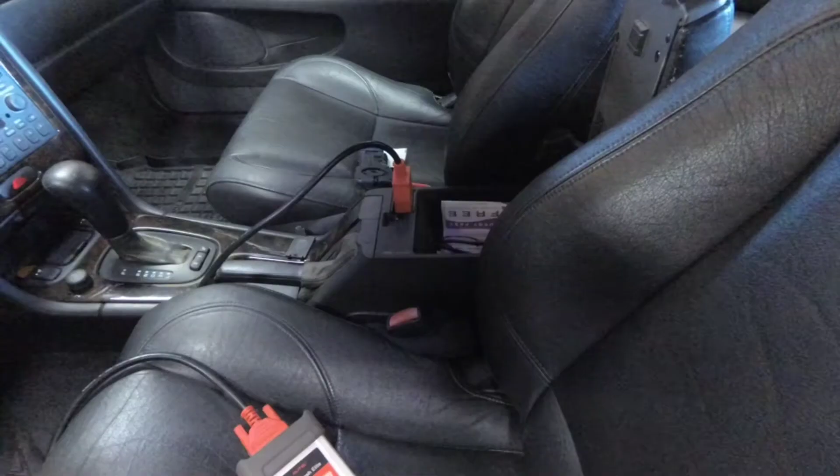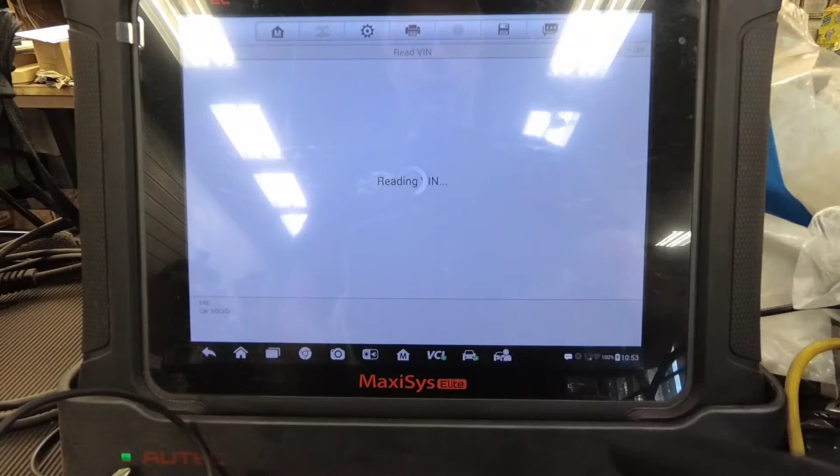Here's another unique thing about this car. The OBD2 connector, according to the service literature, is supposed to be in front of the gear shift lever in that little compartment where the coin thing is, but it's not. It's actually in the console under the cover. Took me a while to find that. So we'll see if this MaxiSys Elite will read the VIN number out of this Volvo. May not support auto ID, but we'll find out shortly.

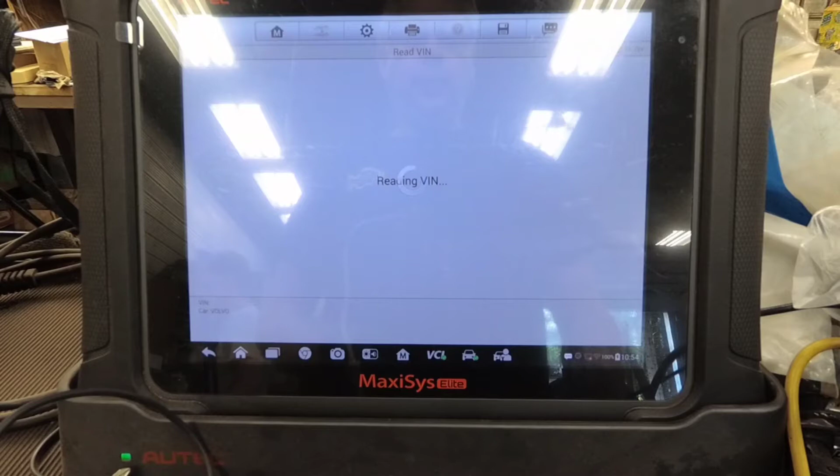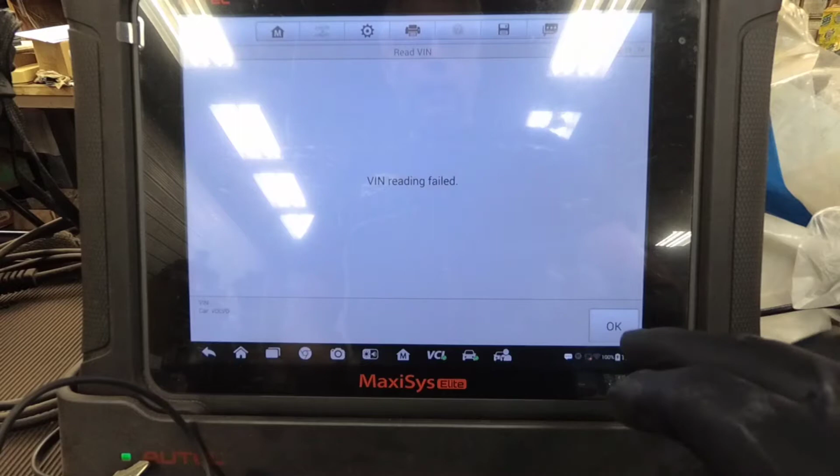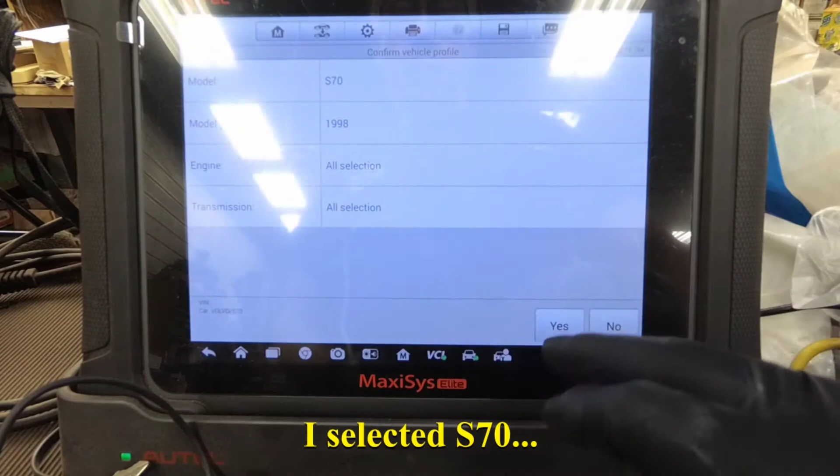So it was not able to auto ID it, so we're going to manually ID it. Manual selection, 98, North America, S70, 98. All selection. Yes. Diagnosis. Auto scan. See if it'll do it. This is why you need to have more than one scan tool. And I'll pick up when this finishes scanning.

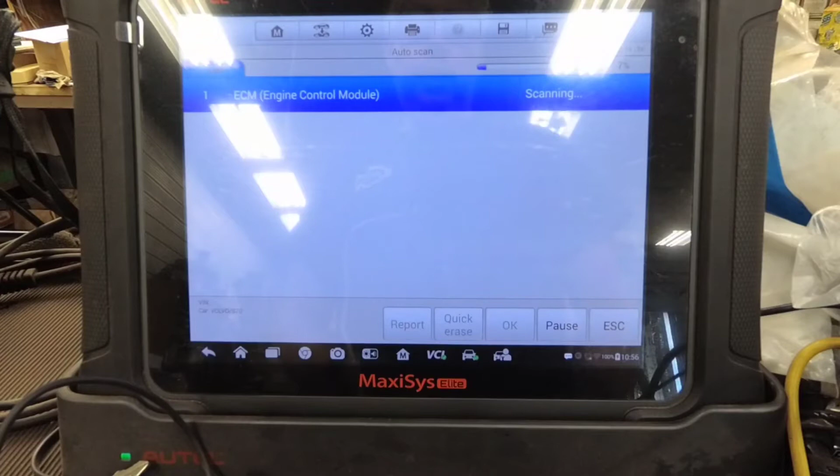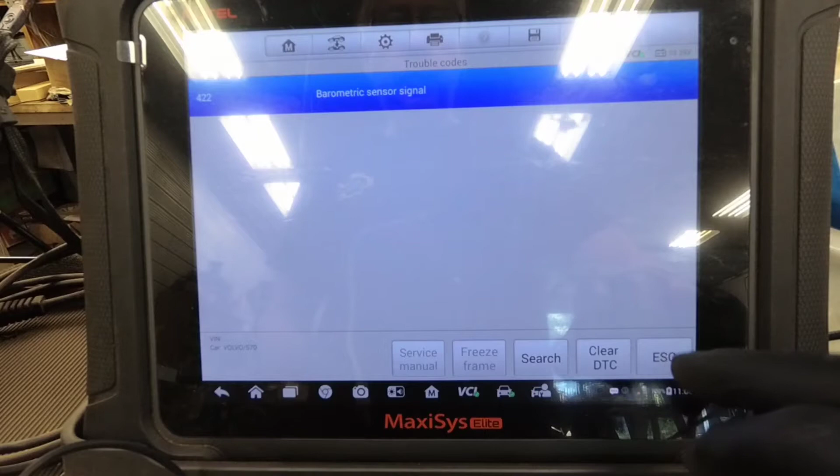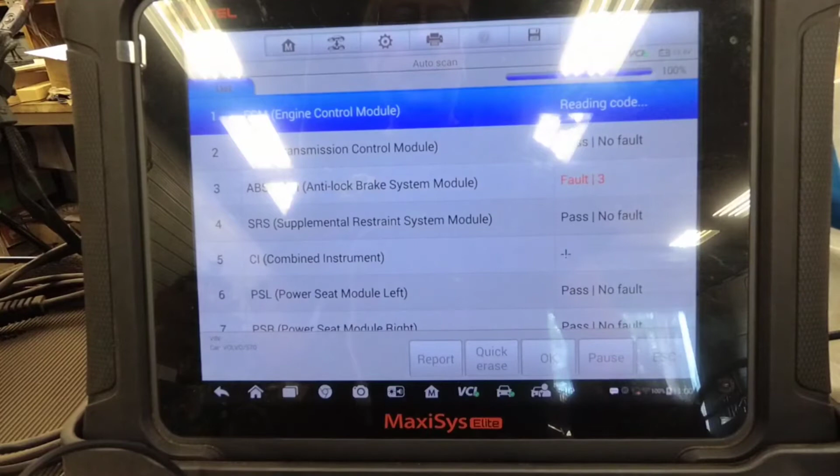And we're going to go in here and have a look at the anti-lock brake system codes. So now we'll go into the ABS module directly. I could have gone to the system report and seen a listing of all the codes in there as well. Wheel sensor signal right rear circuit fault. Wheel sensor signal right rear extrapolation counter. That's a big word. Pump motor electrical or mechanical fault.

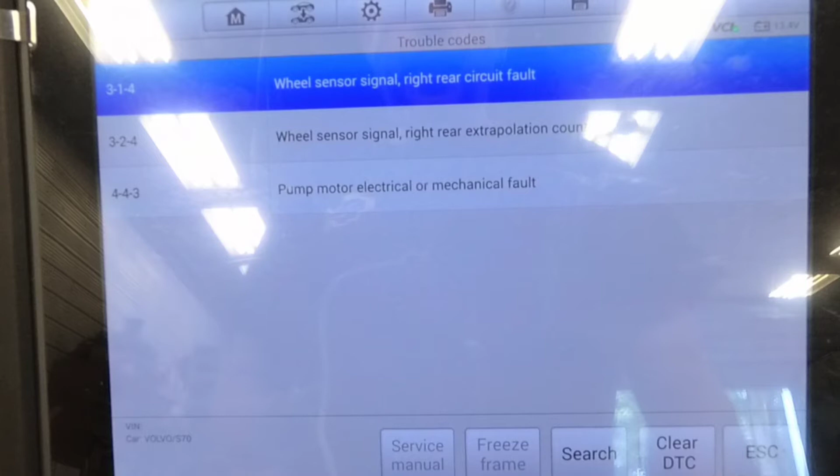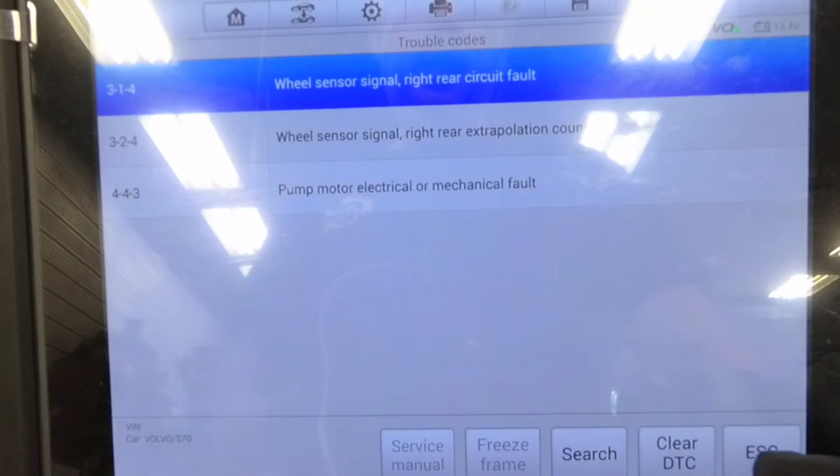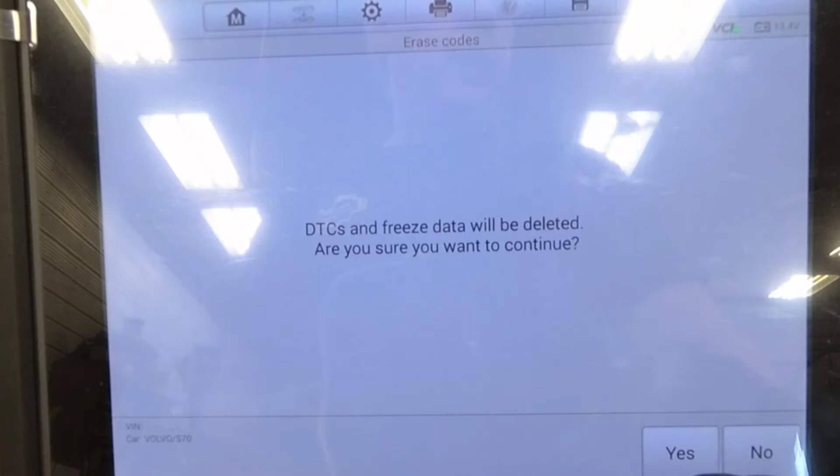Well, these two are probably a wheel speed sensor problem, but this one here may be a problem with the pump motor. Now it's hard to say which one is. Of course, a faulty wheel speed sensor may cause it to run the pump more than it needs to. We're going to clear all these codes and see what comes back, if anything. Wonder if it clears them individually. No, these two keep coming back.

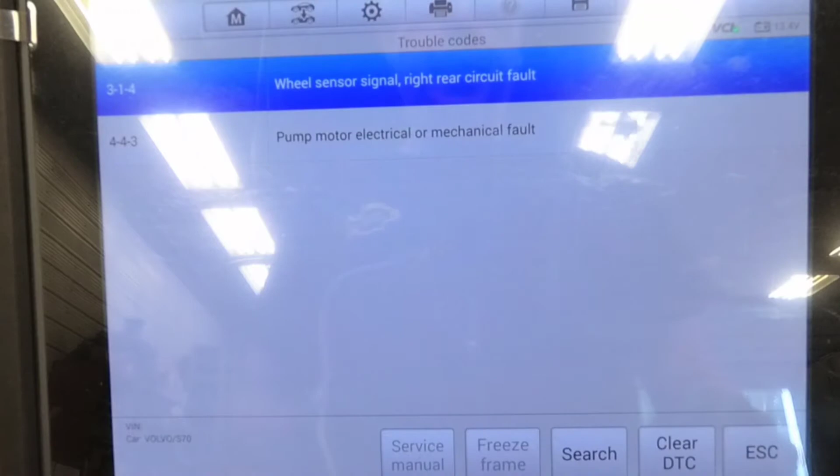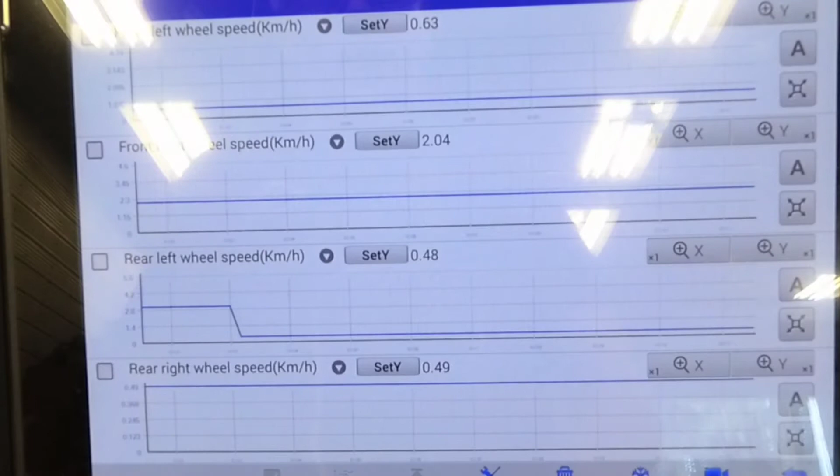Well, I'll do a little bit of investigating. So I'm going to try and graph the wheel speed sensor signals. Why does the front show 2 kilometers an hour and it's sitting still? Okay, both front wheels are turning now, so we got signals from those. Spin the rear. That's the left rear. That one's working. And he's spinning the right rear and we got no signal. I definitely have a problem with the right rear speed sensor, so we'll have a look at the circuit. The front ones are both working, but no right rear.

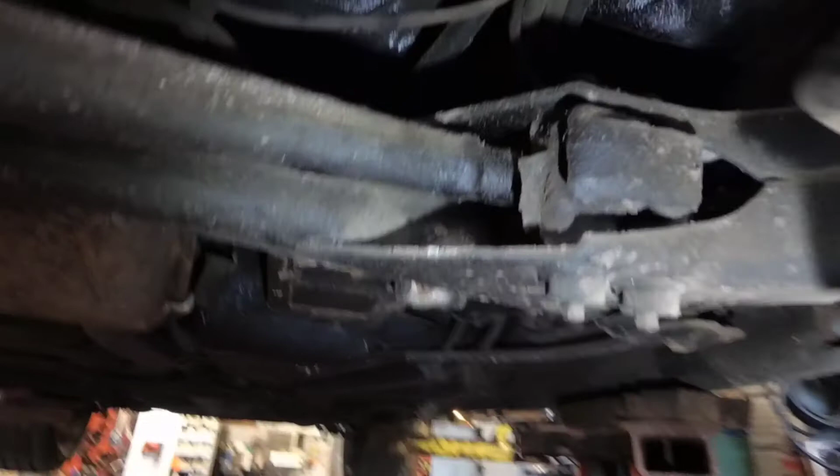So here's the right rear speed sensor assembly. Nothing visually wrong with it. Cable runs up behind the fuel tank, and the other cable from the other side runs all the way across here. So we'll have to see what's common to fail, if it's common for the speed sensor reluctor to fail or the speed sensor itself. I'm a little leery about trying to remove this because sometimes it won't come out of the housing.

So here's the service literature I found for 314. It says failure of the ABS electronic control unit. Test the resistance of the speed sensor, compare it to the other side. Test the AC output frequency and voltage, compare it to the other side. So we're going to have to get to that connector, but before I do that, I want to see what the other fault code, the 443 code, relates to, because that sounds like it's more serious.

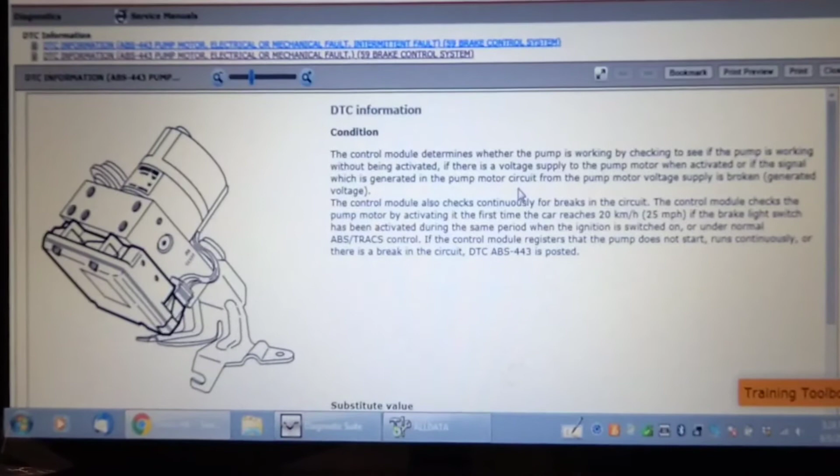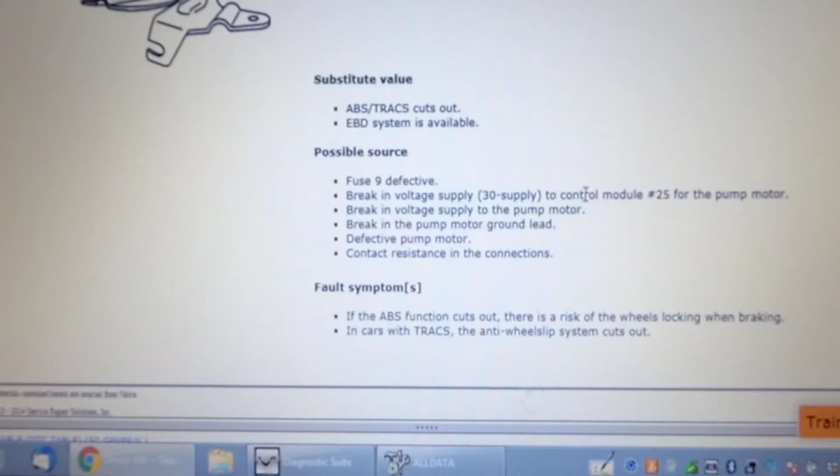So here's the diagnostic flow chart, or the conditions for that ABS pump motor electrical or mechanical fault, code 443. The control module determines whether the pump is working by checking to see if the pump is working without being activated. So it's monitoring the voltage on the system. Fuse 9, supply voltage to the control module, number 25 for the pump motor. So we're going to at least check some fuses. That code won't clear, so that is more serious than the wheel speed sensor code in my opinion.

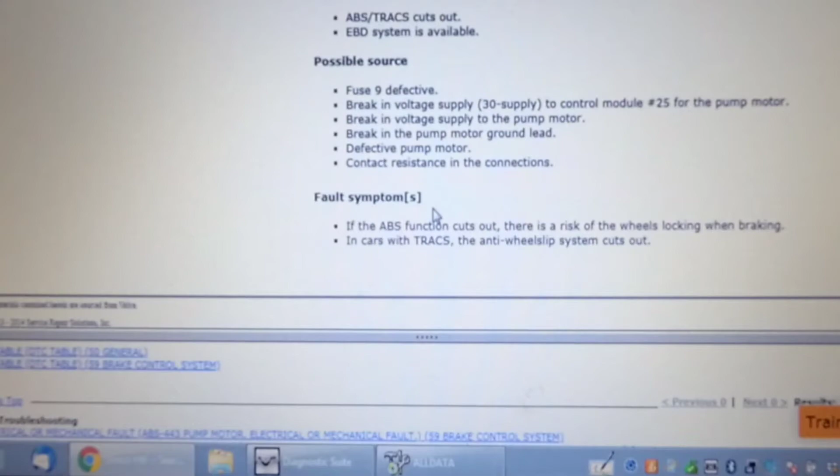Well, fuse 9 is not the ABS fuse in this vehicle. It was actually fuse 3. I can't find any blown fuses, so we're going to have a look at the wheel speed sensor circuit. So both wheel speed sensors come up to that bright yellow connector, which would typically be an airbag connector, but it's not in this case. And we compared the left and right resistances, and 1.1 and 1.2 kilo ohms on each.

Here's the speed signal from the right rear right now, and then we'll hook up and measure it on the left rear and compare. But that looks perfectly normal. Slow down. Maybe a little dirty. Well, we'll compare it to the other side.

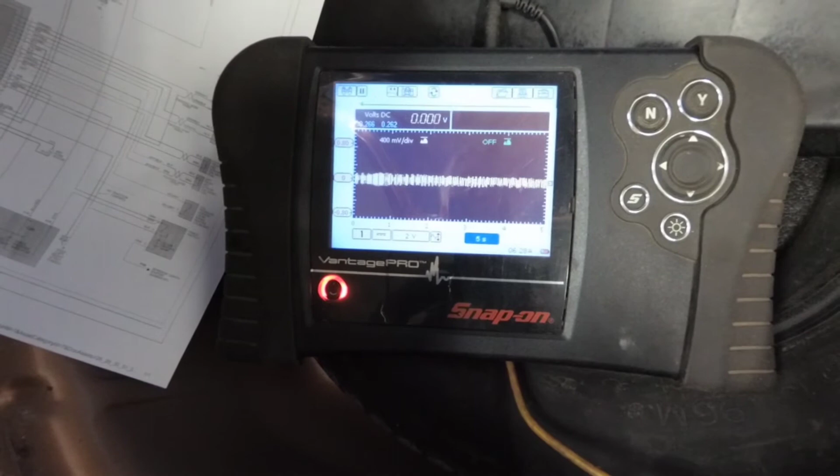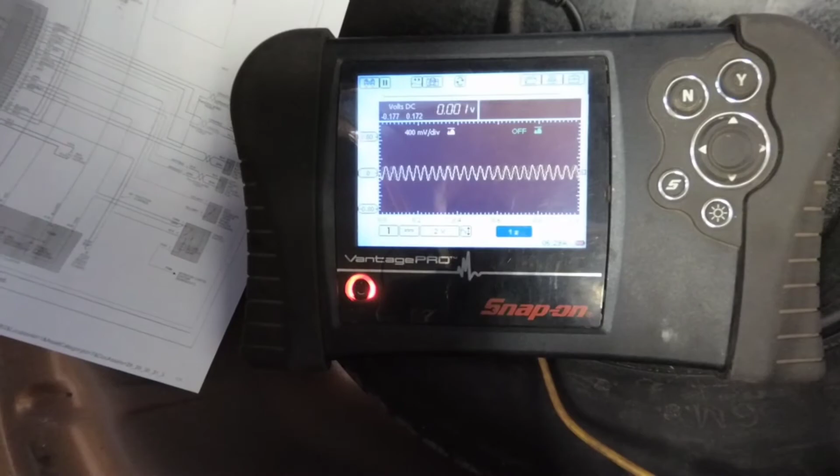So this is the signal from the left side, which is not setting a code, and it looks the same. You can change the time base to 1 second. Yeah, that looks pretty good. We'll compare the other one again one more time. Go ahead, spin it. Okay, so there's the speed signal at 1 second coming from the right rear.

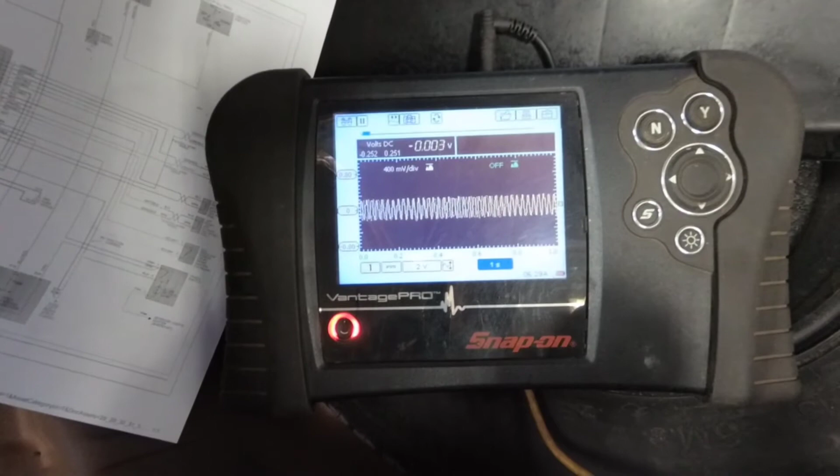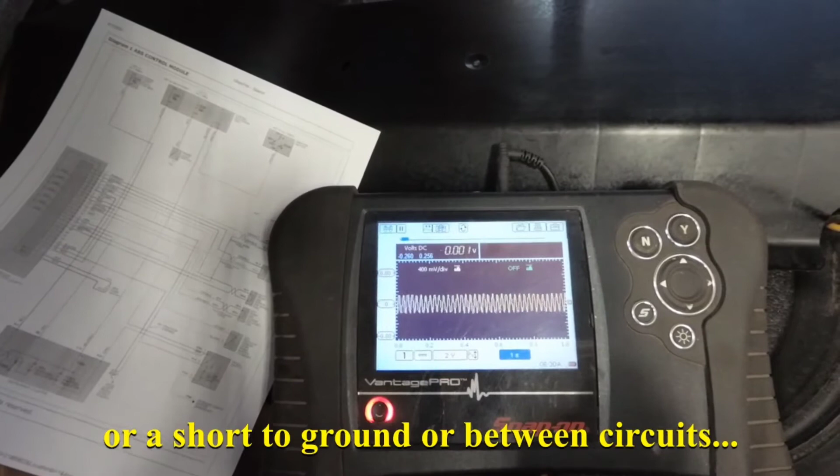So there's nothing wrong with the right rear signals at the actual connector here in the trunk, but there could be an open between here and the ABS module. So the next thing to do would be check continuity of the wires between here and the ABS module to see if this signal is actually making it to the front. So after cycling that connector in the trunk, I'm going to clear the DTCs and see if it comes back.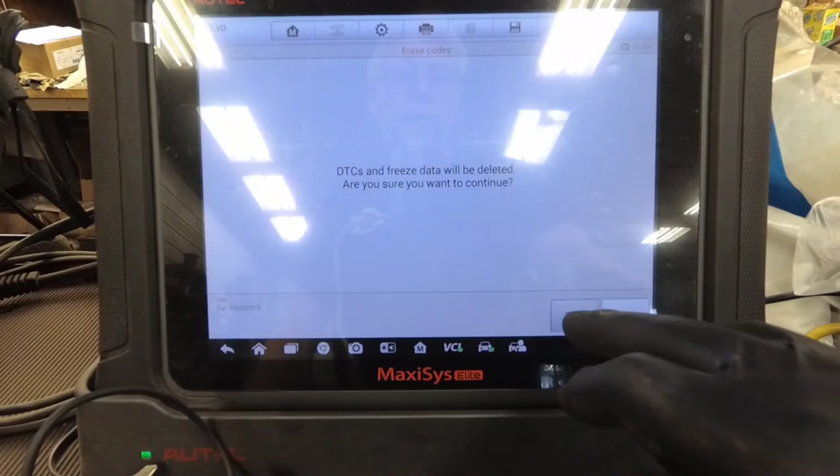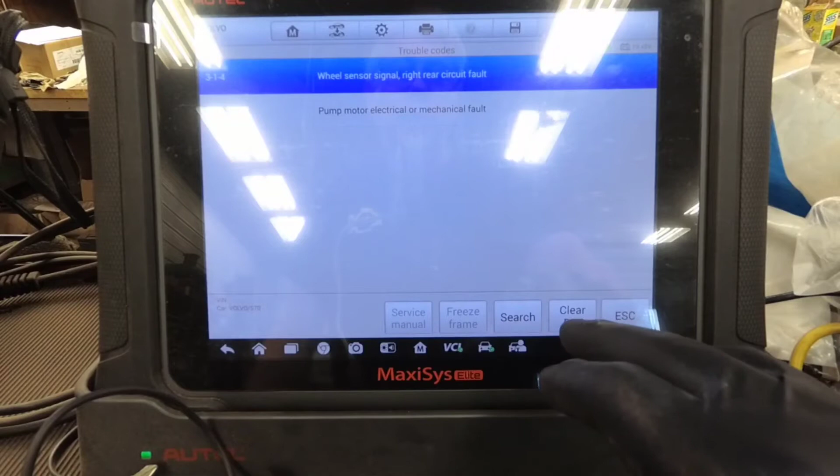Some ABS systems require that the vehicle go through a self-test before it actually clears the codes. But regardless, we can look at live data again and graph the right rear and left rear speed signals. Got a signal from the left. And no signal from the right. So we're going to have to qualify the wiring from the trunk to the ABS module under the hood.

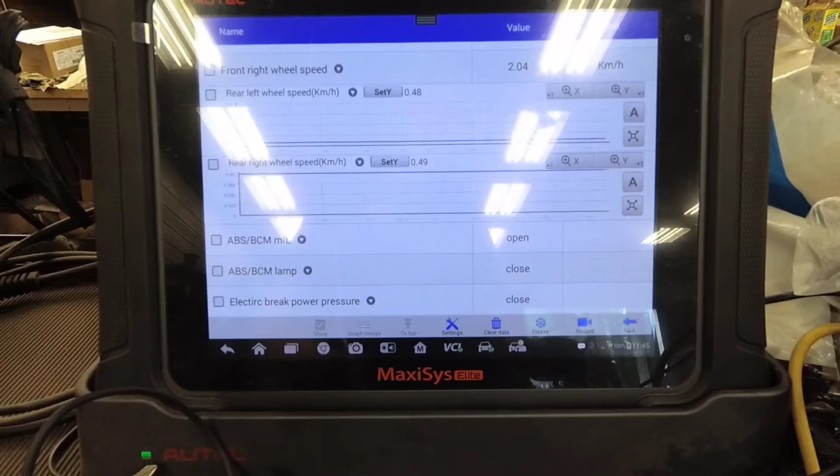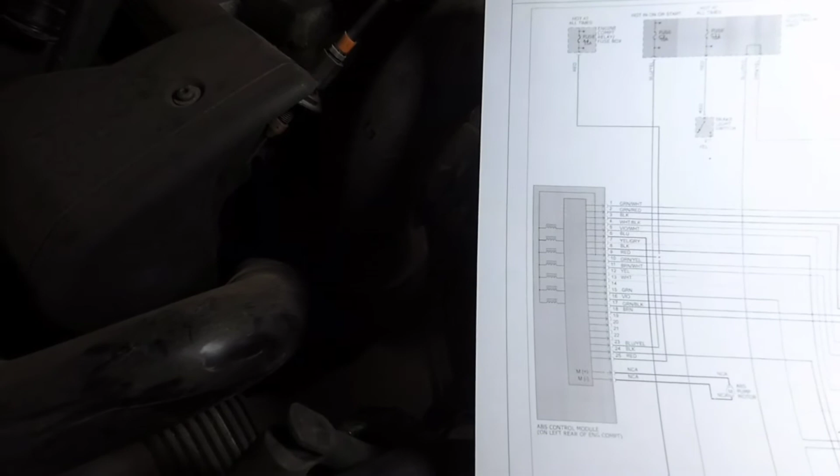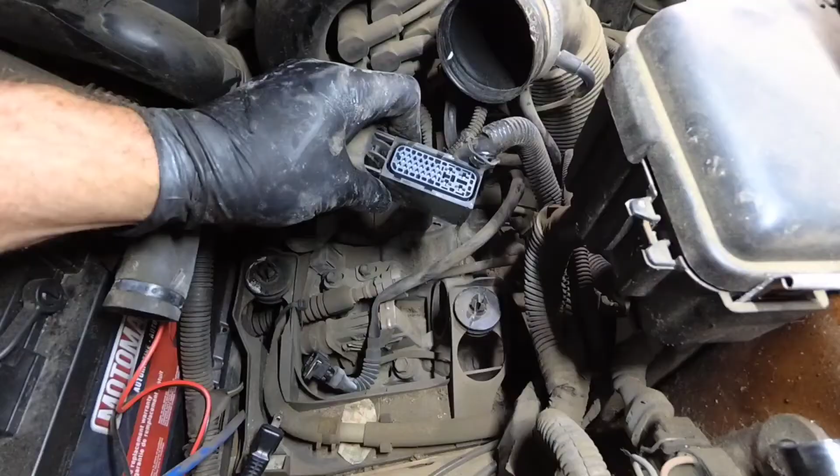So here's where the ABS pump motor assembly is located, down underneath the master cylinder. Access is pretty good if you take the air induction system out. So basically we're going to repeat the same two tests that we did in the back now at the ABS motor pump module assembly. So we have to identify the two speed sensor signals and test it right at that connector in there. And my hydro went off, so I'm working with trouble lights. So basically just lift the cover on the connector and the connector unplugs.

So while we're here we can actually test the power wires coming in here for the ABS pump motor and actually continuity through the pump motor. That's another connector, but we're going to check that, seeing as how we're here. So let's see which two circuits we're working with here. Right rear is pin 1 and pin 17. 1 and 17, so I'm going to have to figure out which one's which here.

I don't see any numbering on here, but the wire colors are there. One is green and white, which is that one right there, and the other is green and red, but that's for the left. So the other one is green and black. So the two right across from each other, these two at the end here. These come from the right rear, and the next two in, green and yellow. Yep, the next two in, right there, come from the left rear. So we check these two and these two.

We'll get set up. So that's the resistance of the right rear, 1.1 kilo ohms. I'll just move it to the next two pins, which is the left rear for comparison purposes. That one and that one. So both speed sensors measure the same resistance. Let's check for a short between them, just in case. It's over 4,000 ohms between that one.

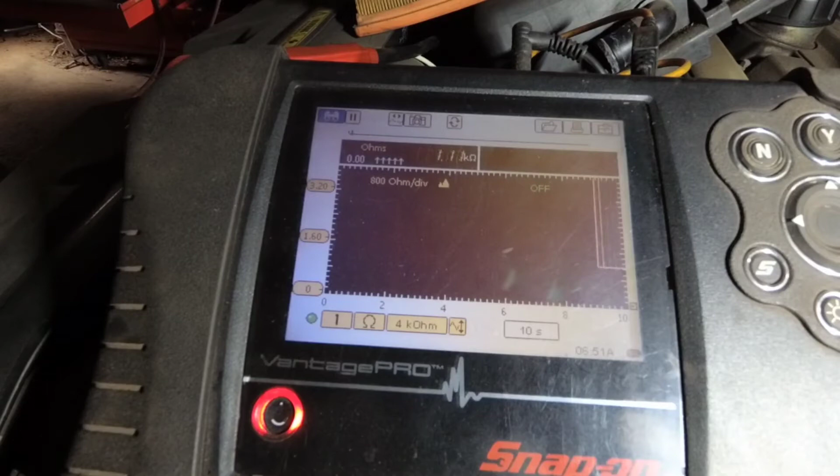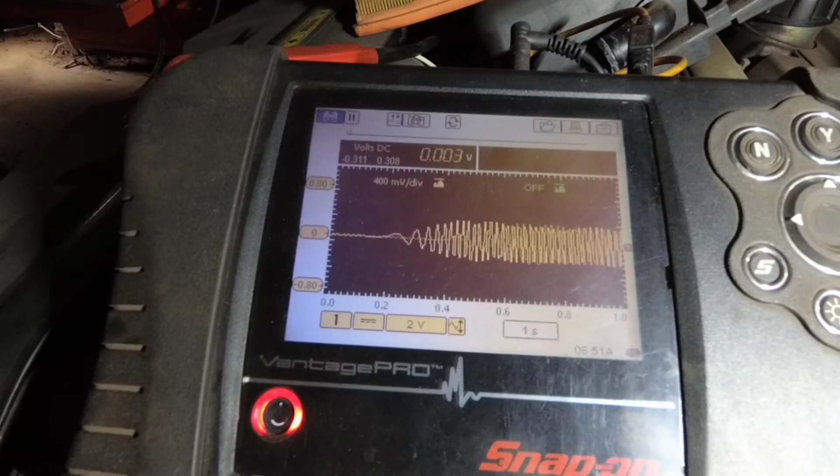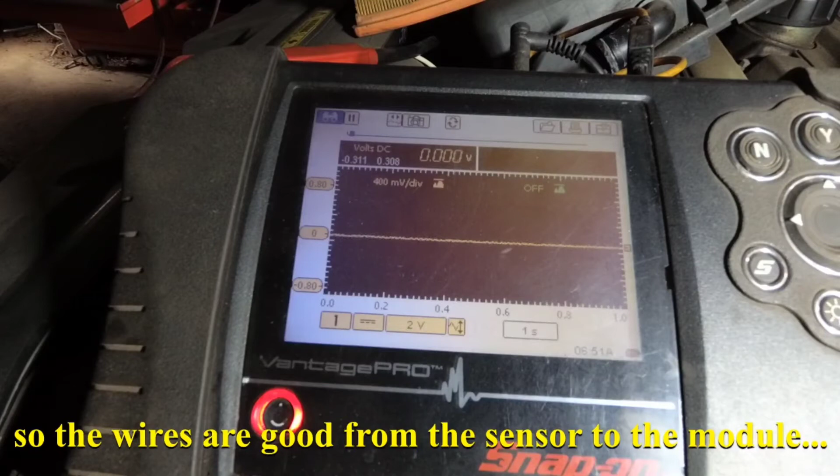So I'm back on the right rear. I'm going to set this up to read DC voltage. Read DC voltage with the 0 line. I'm going to spin the wheel. So as you can see, there's a signal, which means that the ABS unit is failed. Well, we might check powers and grounds to this thing just to be on the safe side, but it's looking like it's going to need an ABS module assembly, but it may need a pump motor as well.

So there are two heavy power wires coming in, these two red wires, and two heavy ground wires coming in, the two black wires. So I'm checking using a headlight to load the circuit. There's one, and there's the other. And this ground over here works fine too. So I'm sure the powers and grounds are good. I'm going to check continuity of that pump motor as well.

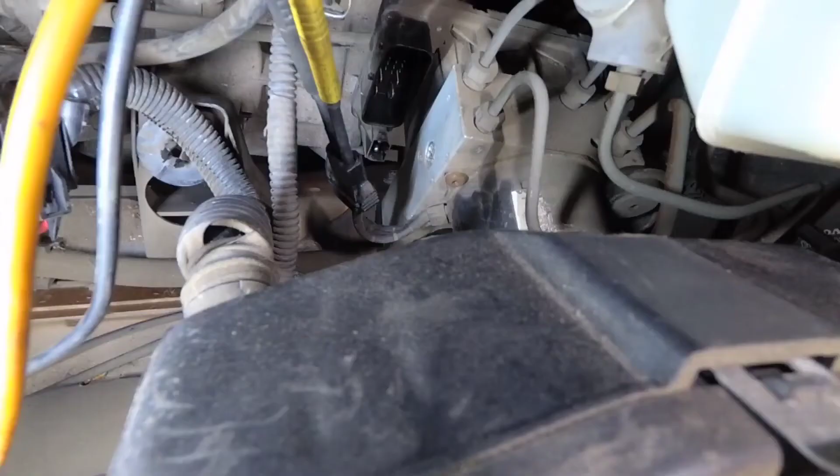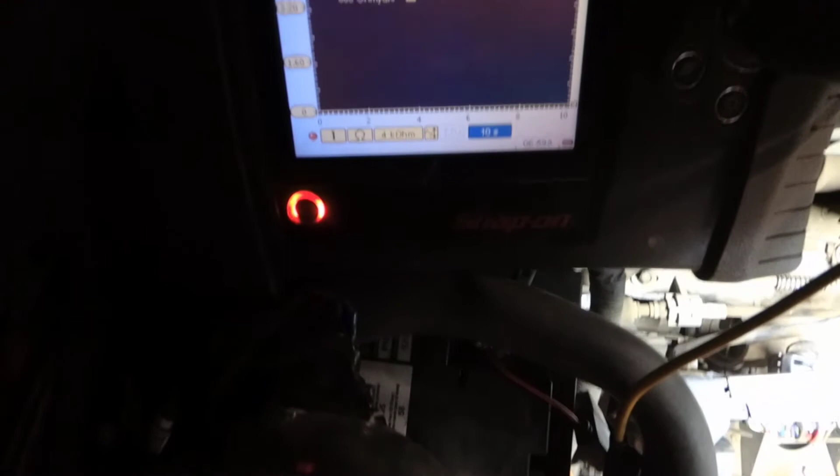So this is the pump motor down here, right here. And there's two wires coming off it that plug directly into another connector at the module. I've got it disconnected and I've got an ohm meter across it. And it reads 0.01 kilo ohms. Now I need to change the range to 40 ohms. And it reads 4.8 ohms. So the motor is not open and it's not shorted.

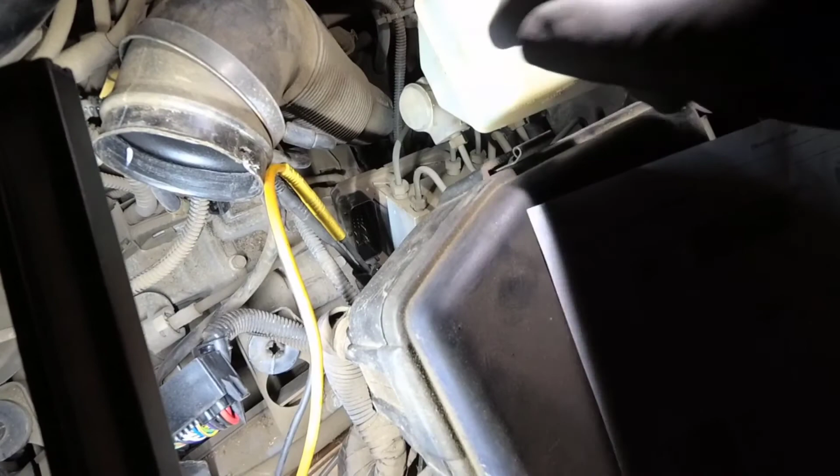Although that's not a perfect test. If it did test open or shorted, that would tell me that it's defective. But regardless, it needs the electronic portion of this ABS unit. Now whether you can service that separately from the hydraulic unit, I know you can on domestic vehicles, but I'm not sure about this.

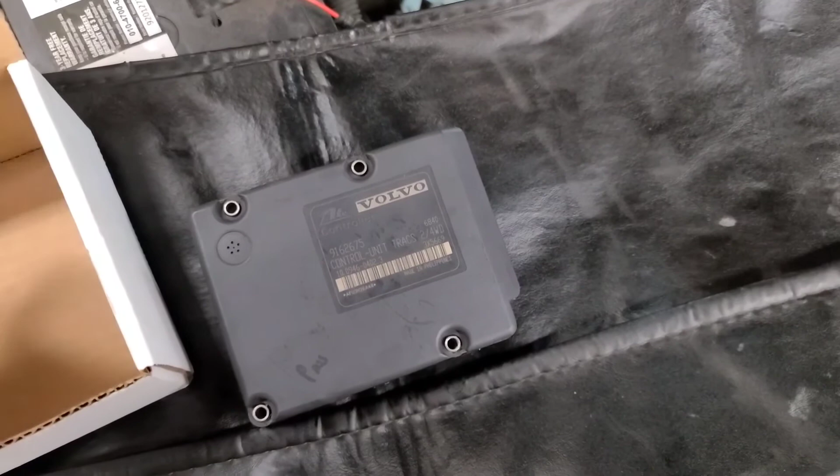It's a remanufactured module, and the old one has to be returned for a core. They even supply a, I think it's an E5 or E6 socket, I'm not sure, I probably have one anyways, to remove the module. Now I've taken the air cleaner box out of this thing, and the module lives down here. It looks like it's fairly accessible as long as the fasteners come out.

So the air box is out. The air induction is out of the way. Just going to disconnect the module and replace it. So it's actually an E5 bit that you need to take this off. I have it, so I didn't use their socket, but they supplied a socket, which is a nice touch.

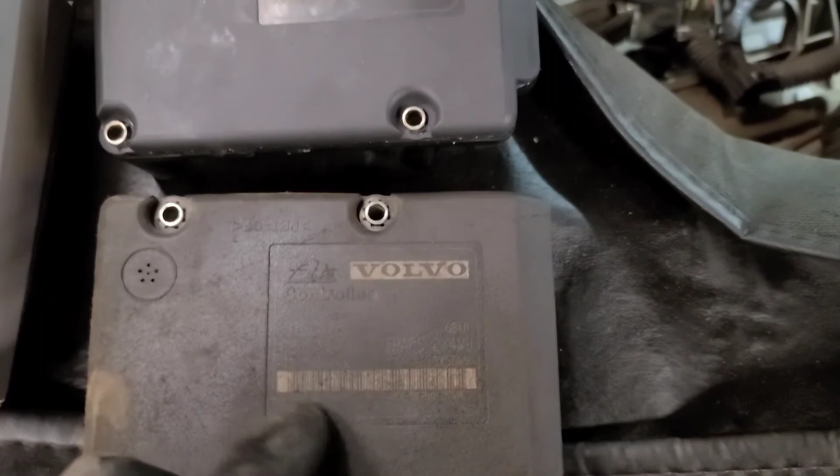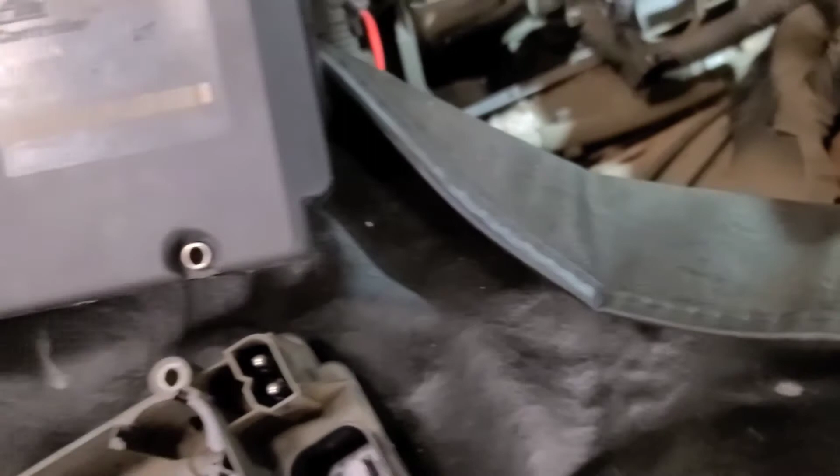Make sure the module is the same part number. 9162675. 9162675. This one came out quite easily. The 4 screws from the bottom. There they are.

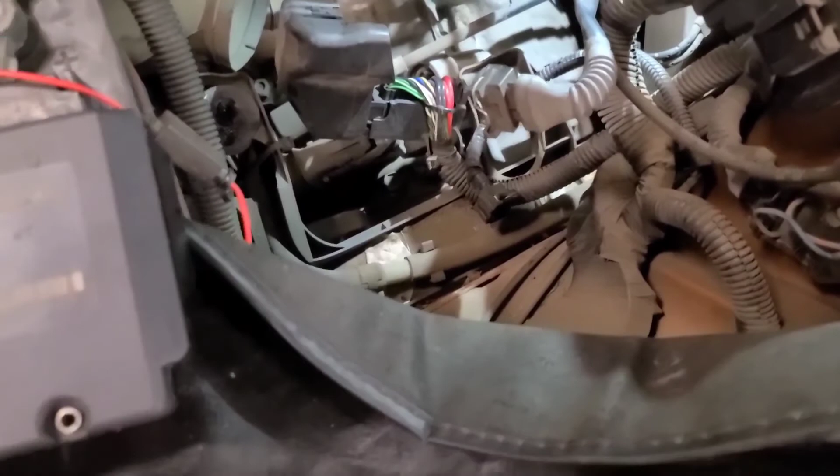And basically reverse procedure to install it. Just have a look, make sure that it looks the same. Even though it's the same part number, it looks the same. Cool, so we'll put it in and see how it works. So we're going to start it and see what lights we have on.

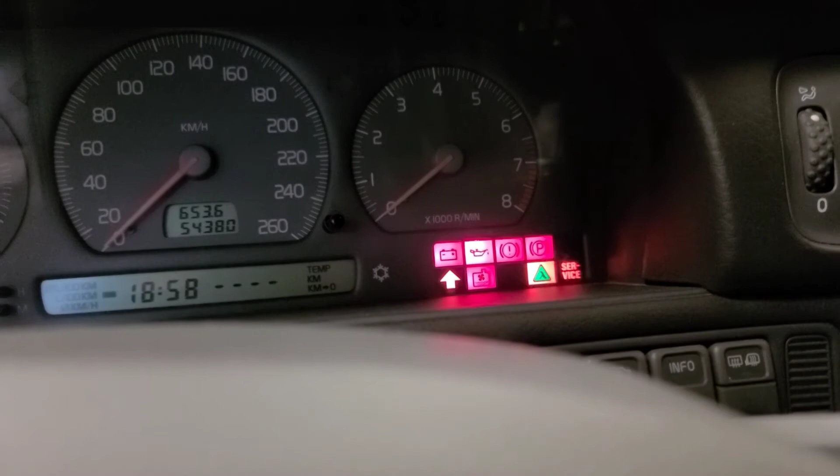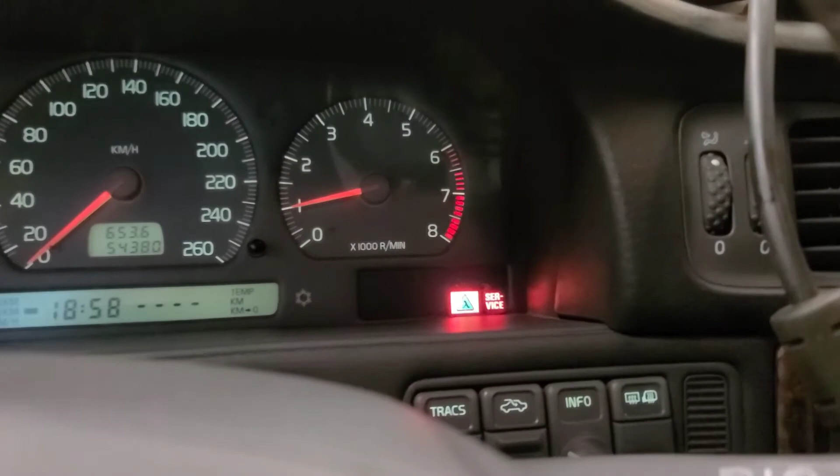See, we still have a service light, and I don't know what that green triangle with the amber sign around it is, but no ABS light. That was above the service. So I'm going to see what codes it has now. We've got the scan tool hooked up to the DLC here, so we're going to scan it and see what codes it's got. But the ABS light is off.

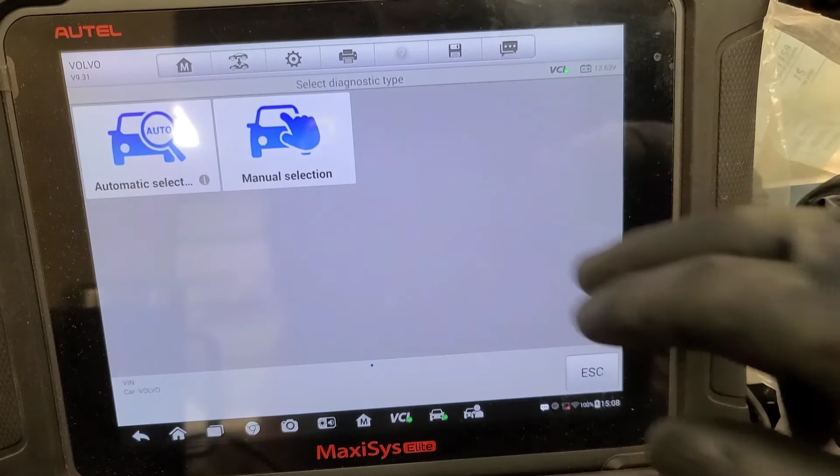So I was looking up the history on this vehicle, and it just dawned on me that the Snap-on scan tool did not support this car. So we're going to have to use the Autel MaxiSys. Okay, I remember now, this thing didn't auto ID, and it wasn't supported by the Verus Edge, so I had to use the MaxiSys scan tool that you see here, manual ID it, and it's a 98, and I went with North American.

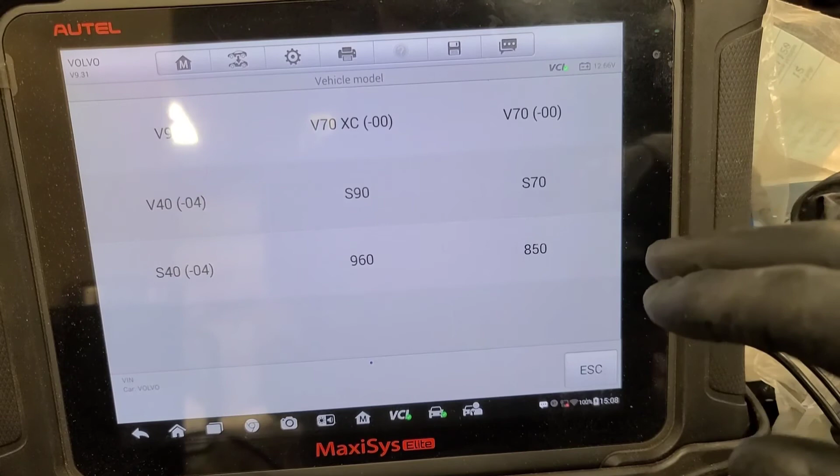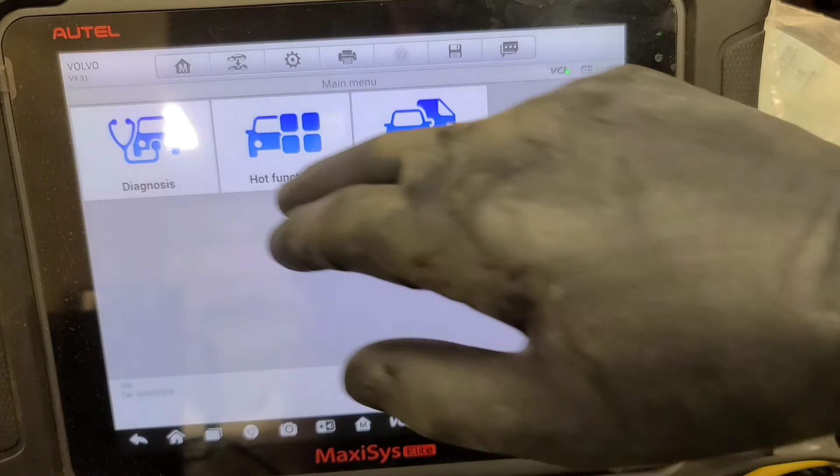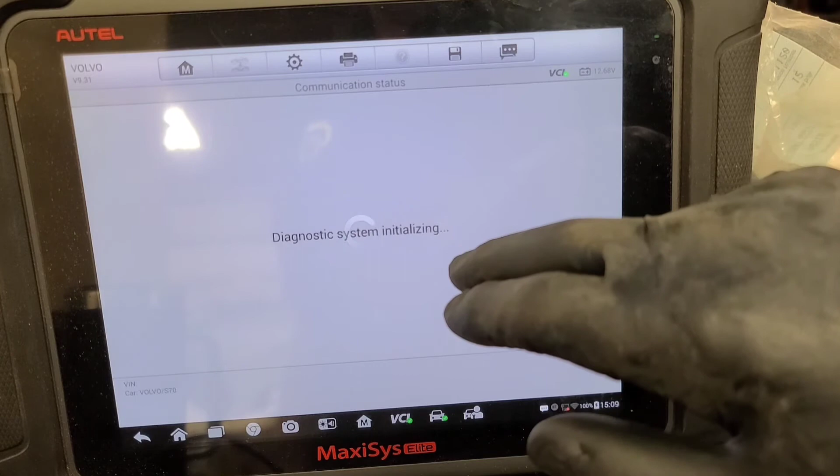Now, here's where I ran into a glitch. It's a C70, and that's not listed there, so I think I picked S70, and it's a 98, all selection, yes, and diagnosis, control unit, and ABS. I see the ABS warning indicator is off the dash, but that little green triangle is still there. I'm not sure what that means. Trouble codes.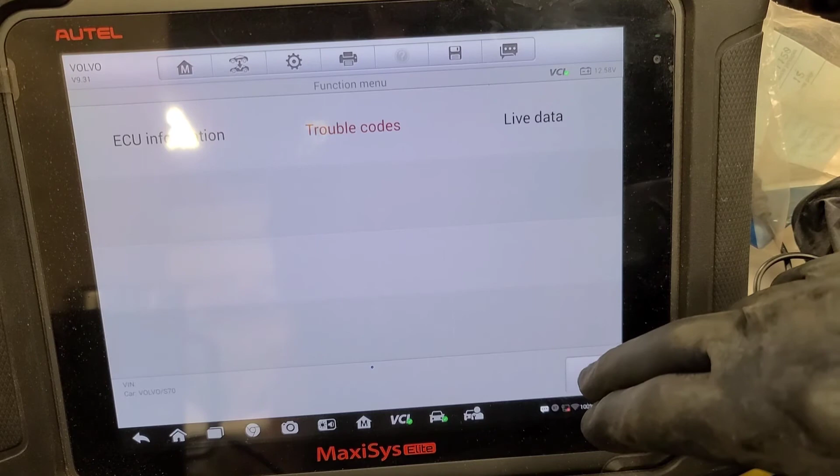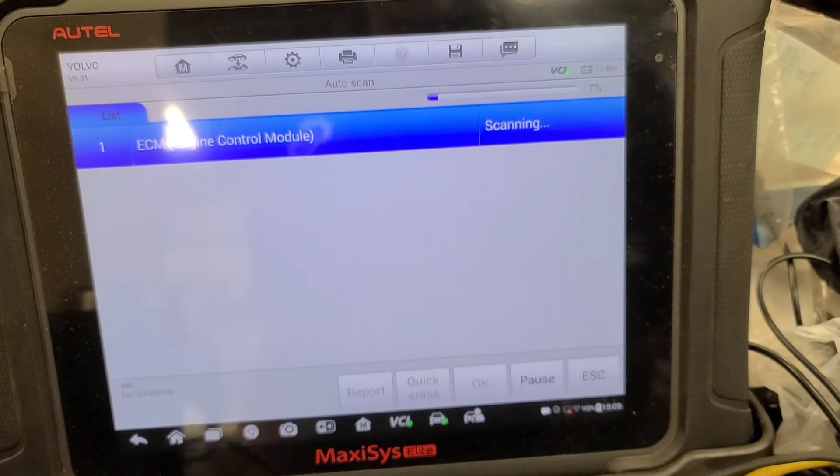We had a code before for the right rear speed sensor, yet the circuit was working all the way up to the ABS module. So the codes are gone now. Let's do auto scan and see if there are any codes in any module. So I'll pick up when that gets through. So I see there are 2 faults reported in the ECM. That could be due to me unplugging the mass airflow sensor with the key on, and then turning the key on as I did before I put the air induction system back together. So we'll be sure to clear those codes, but we'll check to see what they are once this finishes the network scan.

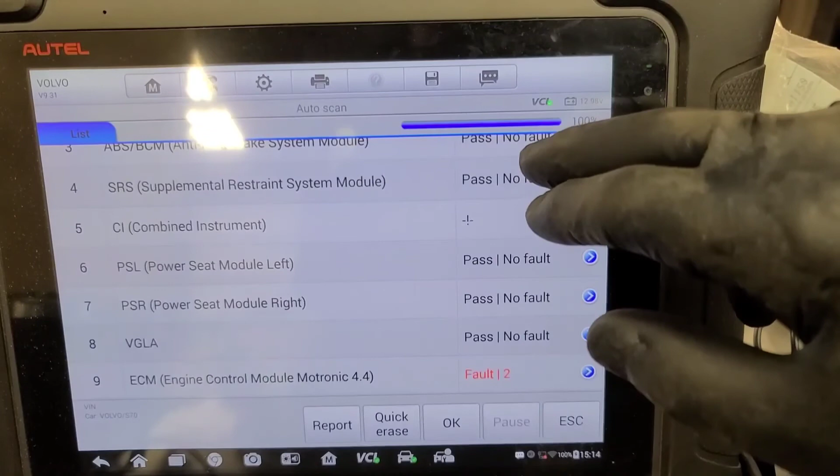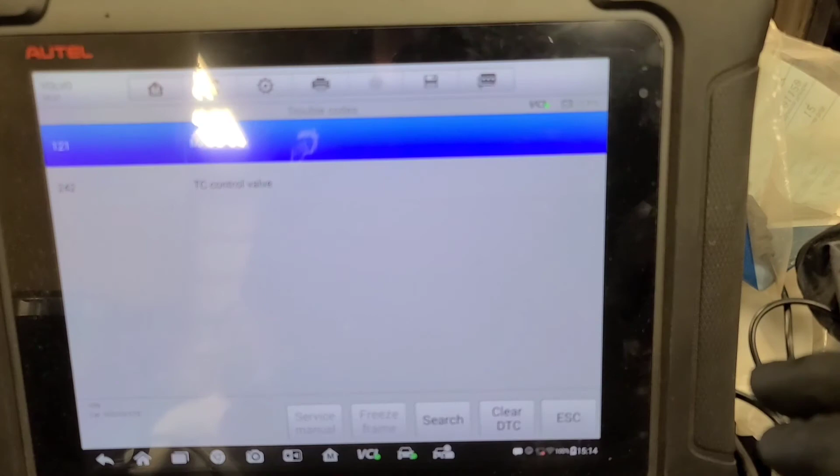So I looked in the owner's manual. Turns out that that fancy green triangle with the amber outline is the check engine light, believe it or not. So that's probably on due to these ECM codes. So let's see what codes we have in the ECM. Hopefully they're related to the mass airflow sensor or intake air temp sensor, and we can just clear those. MAF sensor, TC control valve. Well, let's try clear it and see if the light will go off.

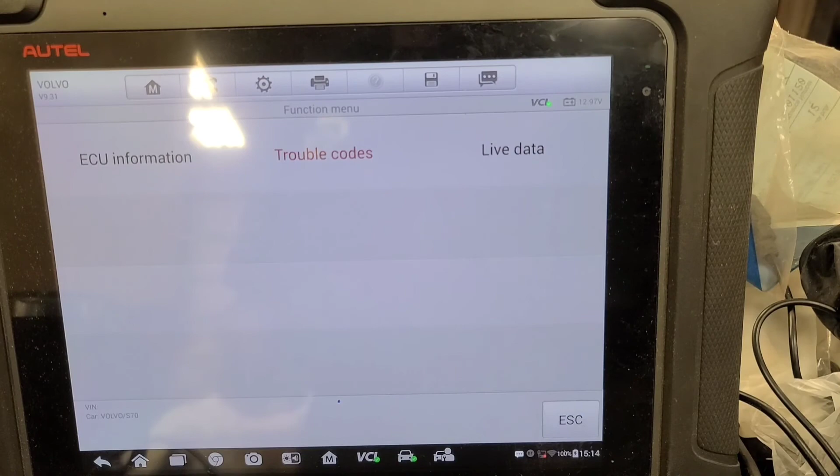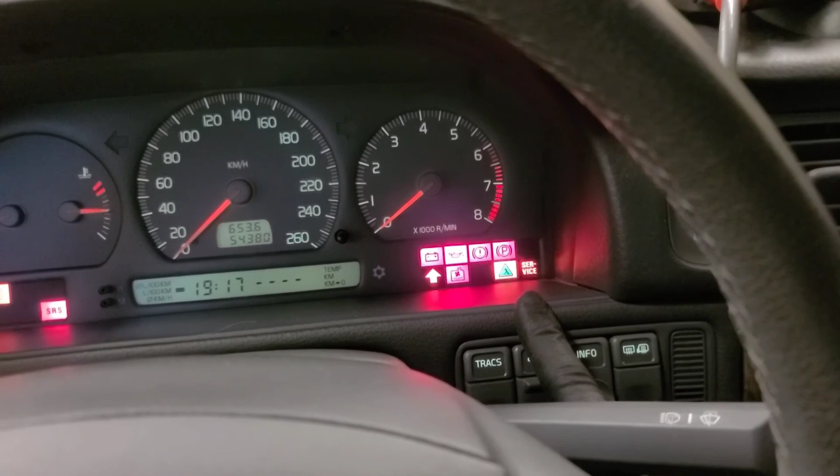Codes has been successfully erased. I'm just going to read them one more time. It says no faults detected. So let's go have a look at the car now. Well, that's good. All the warning lights are off. So it turns out that that light was the check engine light, believe it or not. Obviously, that amber light with the green triangle in it, they didn't have to meet current North American OBD2 standards.

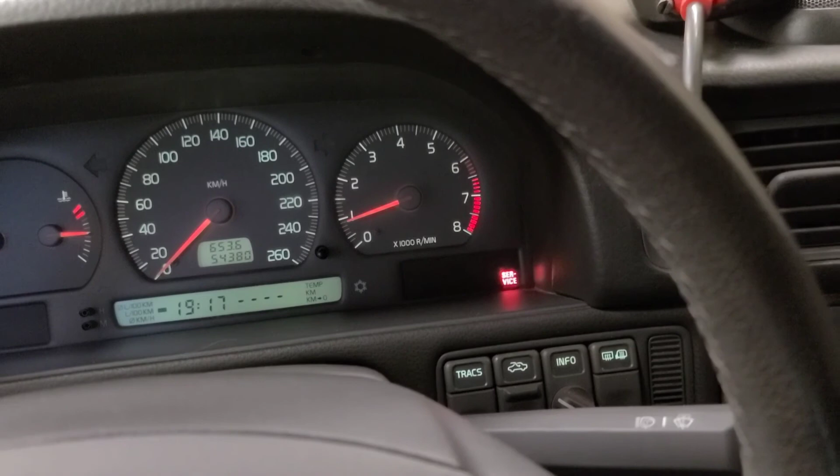And I don't know what the service light means, but it does go off after a few seconds. It could be oil change. I'll look it up in the owner's manual. But for now, the ABS code is cleared. I'm going to take it for a road test and see if any warning lights come back. We'll call this one a wrap.

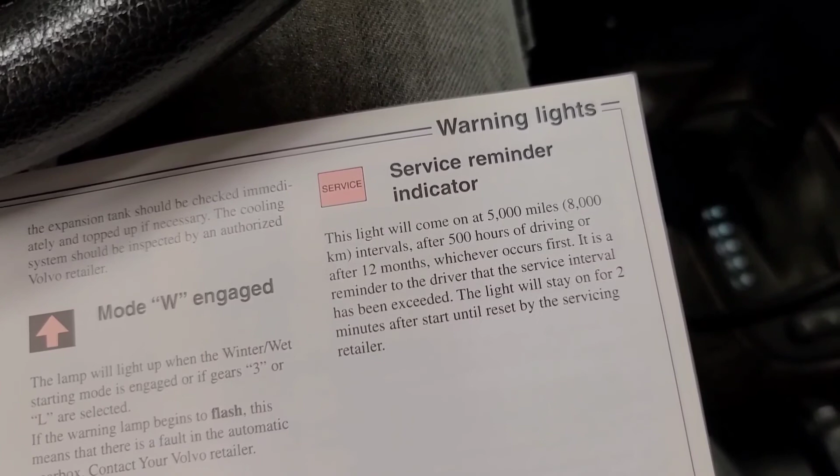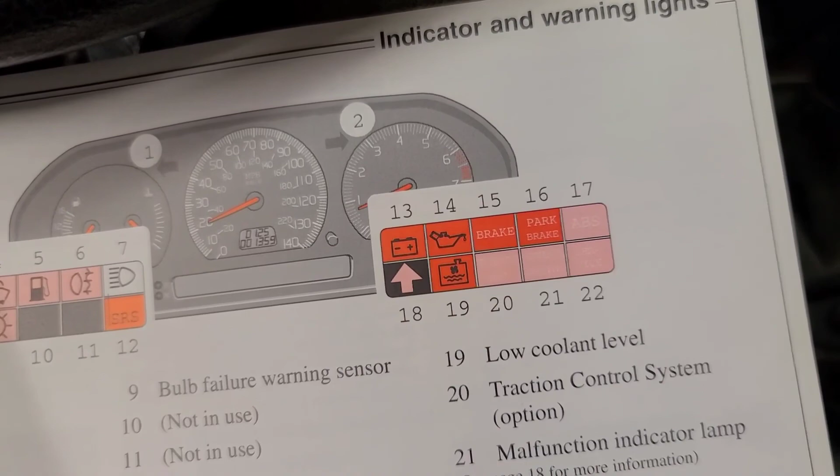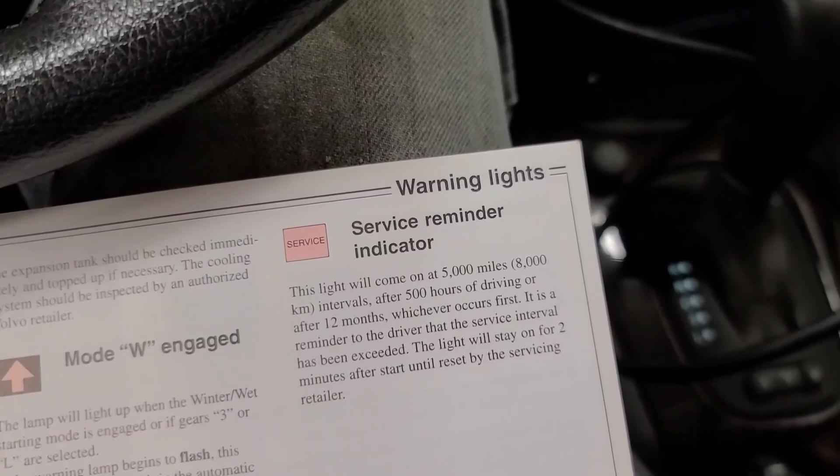So there's the information on the service reminder light. It will stay on for 2 minutes to tell you that you've exceeded the 5,000 mile, 8,000 kilometer interval. It just went off just now. And the other indicator light, this one, item number 21, as you can see here, is the malfunction indicator light. See page 18 for more information. So there is a process to reset the service reminder, and that's done, I imagine, when an oil change is done. They're probably not going to give us that information in the owner's manual, but I'll see if I can find it.

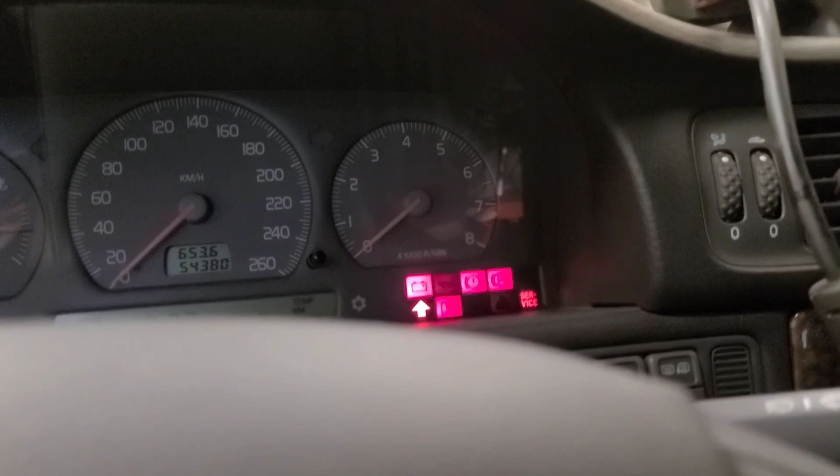So it turns out the MaxiSys scan tool will reset the service reminder in the instrument cluster options, and so now when we start the vehicle, it goes off immediately. If it needs to be reset or a service is required, it stays on for 2 minutes after starting the vehicle, just to nag you to tell you that it needs to be done. I'm going to check with the owner and find out when the last service was done, because this oil change sticker on the windshield is pretty old. But otherwise it should be good to go.